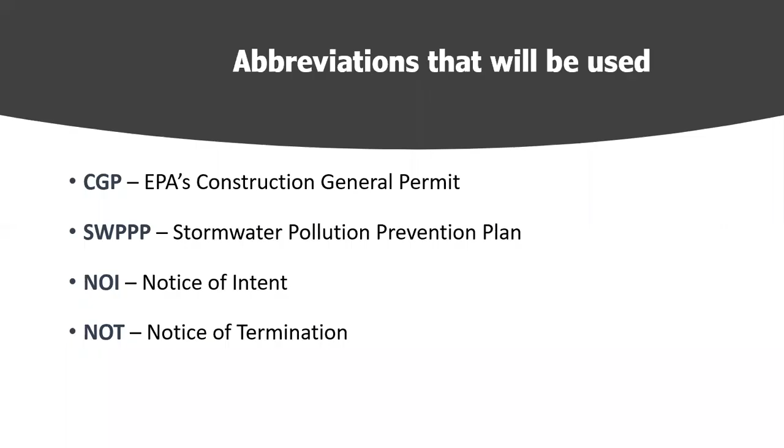Things to keep in mind overall: the presentation today is focused really on what's changing from the previous permit. We're not going to do a nuts and bolts CGP overview. Really, we wanted to highlight just the changes. So hopefully that makes sense. But if you have questions about other requirements in the permit and we have time, we're happy to go over those.

The other thing, secondly, is that when we go about changing a permit, or proposing, in this case, the change of a permit, there's a process we go through. We don't just come up with these things that we feel like putting in the permit. We went through a process here where we reached out to different stakeholders, states, and regulated construction people in the industry. We talked to states and our own inspectors and permit writers as well. And what resulted from that was a list of things that we either needed to clarify in the permit or to change. So that's how that has arisen.

Also keep in mind the bulk of the permit that exists right now, if you're familiar with it, is not changing. The modifications we're looking at are focused on very specific issues or clarifications. And then lastly, one of our thoughts here is that we're hoping that people will read the permit, comment on it, and provide feedback. That's how we learn how this is going to impact you all in the real world. So that's my pitch for you all to comment.

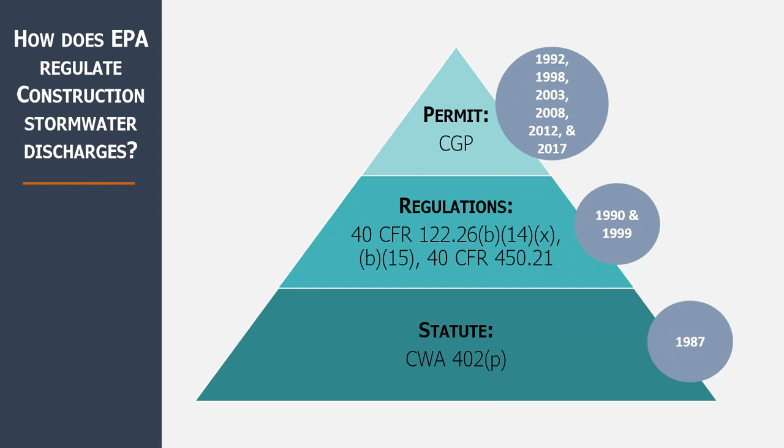What is regulated? We regulate construction activity, stormwater discharges from construction activity. I mentioned that over time this has been established to be 1 acre of land or more disturbance, or smaller disturbances that are part of a common plan of development.

You can think about a residential subdivision that's being built over time, but in quarter-acre chunks, which individually aren't an acre but over time add up to over an acre. So those would be regulated as well.

Basically, a Clean Water Act permit is required, typically a general permit. And what is construction activity? We define it as any earth disturbing activity, but we typically shorten that to clearing, grading, or excavating, or other construction related activities. Other construction related activities could include regrading of roads.

Other activities include placement of raw material at the site and stockpiling of fill material. There are other things that involve disturbances to the surface that could measure 1 acre or more, and those would require a permit.

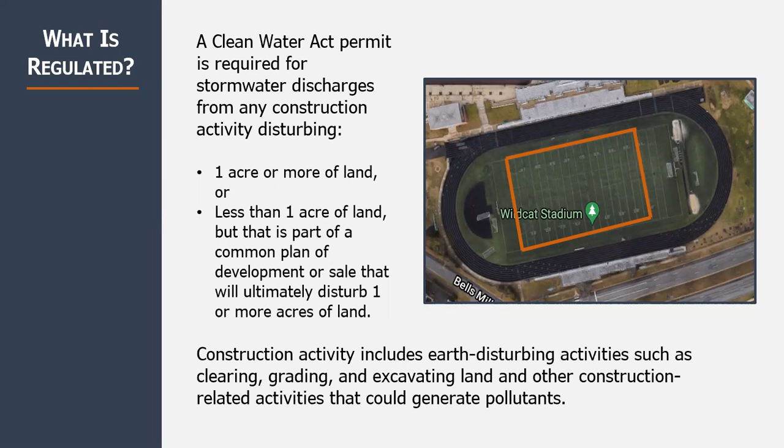There are also minimum federal standards that EPA put out in the mid-2000s, referred to as the C&D rule requirements, or construction and development rule. They're made up of narrative requirements for EPA and the states to include these 5 minimum things I've listed here. They're essentially pretty commonly used principles.

Permit writers are given the ability to elaborate on what's meant by these things. For instance, the first is to design, install, and maintain effective erosion and sediment controls and pollution prevention measures - those are often spelled out in more detail in the permits. You'll also recognize in other permits and in EPA's permit, there's a deadline for stabilizing sites - that's 14 days, established by federal standard.

There's also language about dewatering, which I'll go into in a bit. There's language about prohibiting the discharge of certain wastewaters, chemicals, and other substances we don't want getting into the waste stream - that's where pollution prevention measures come in as part of construction permits. Lastly, if you're using a stormwater basin of some kind, there's direction to utilize outlet structures that withdraw water from the surface. You'll see that in just about every permit out there.

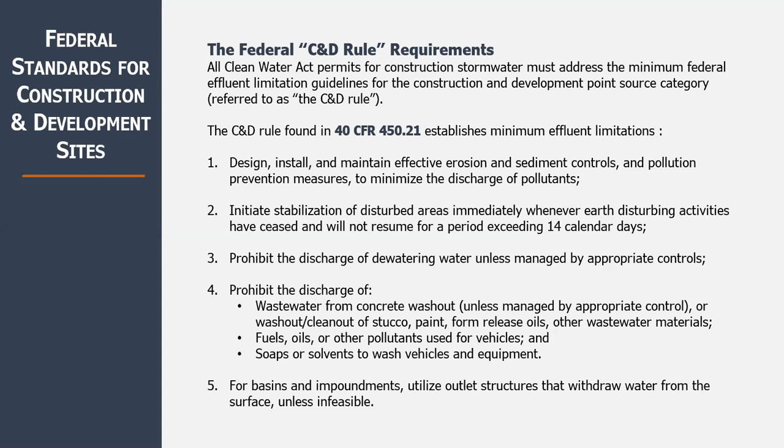We like to think of the CGP as being made up of 4 different bins of activities: you're preparing, you're getting covered, you're taking action, and you're stabilizing. The first step is to prepare - you need to make sure you've got a construction activity coming up, a project.

You would check to make sure you're eligible - basically, make sure you're in an area where the CGP applies and you're disturbing 1 acre or more. You also need to develop a SWPPP for your site to comply with the permit, and then submit your Notice of Intent, the NOI form I mentioned before. You do that online, and the result is you get coverage under the CGP for the length of your construction project.

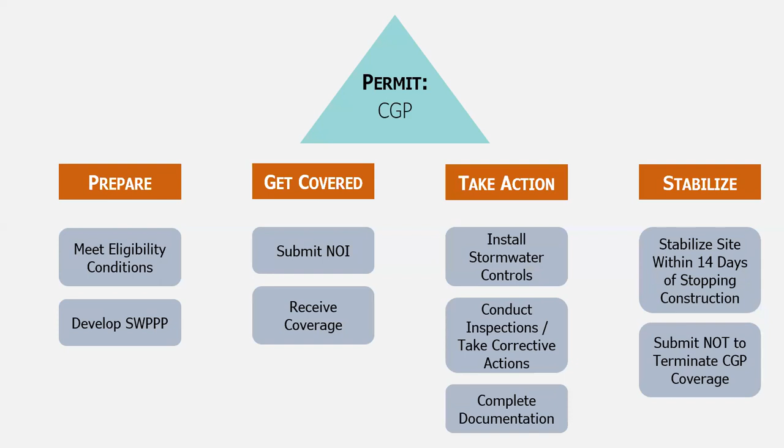Undertaking action, the permit's going to require you to install stormwater controls, conduct inspections and take corrective actions, and then document your inspections and any maintenance or fixes to the stormwater controls. Those are also requirements. Once you're finished, there's requirements to stabilize the site within 14 days, and once you've done that, you submit your notice of termination to terminate coverage.

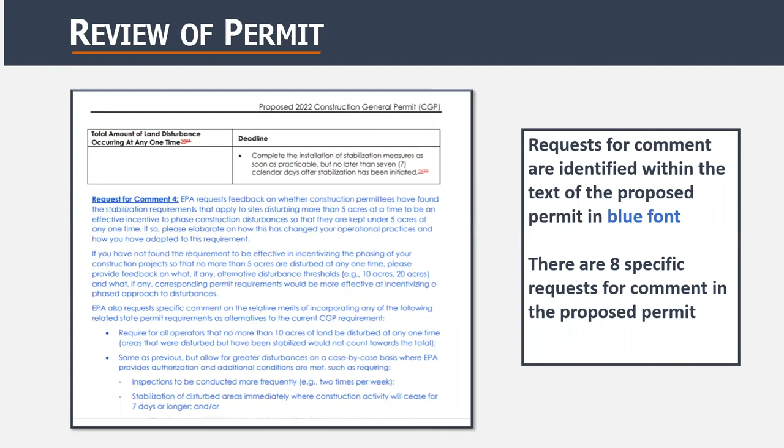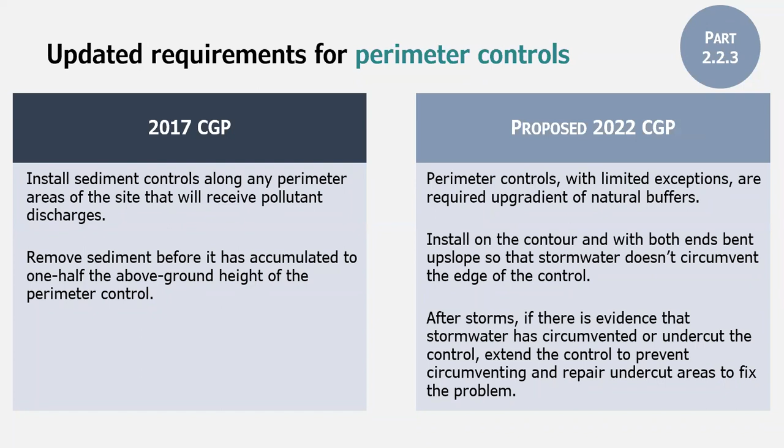The next type of change we made, again regarding stormwater controls in the CGP, has to do with stabilization. I mentioned before that there's a time frame for stabilizing construction disturbances once the project is done, or if you're even taking a temporary pause in construction for a period of 14 days or more, you need to stabilize.

When you're leaving the site at the end for final stabilization, currently under the 2017 CGP, there's no additional requirement to ensure that that's taken place. We've been hearing a lot from our inspectors that stabilization is frequently inadequate, and we would like to address that.

One of the ways we thought would be reasonable would be to ask permittees to submit photographs of the stabilized site. This is something you can do electronically with the NOT form.

We're asking for comment on that, but basically we're not thinking of anything more sophisticated than photos you can take with your mobile phone. We're also asking for comment on whether you believe there's any criteria we should put in place to ensure the photos are accurate, representative, and of good quality, or any other considerations you think we should have besides just requiring photographs.

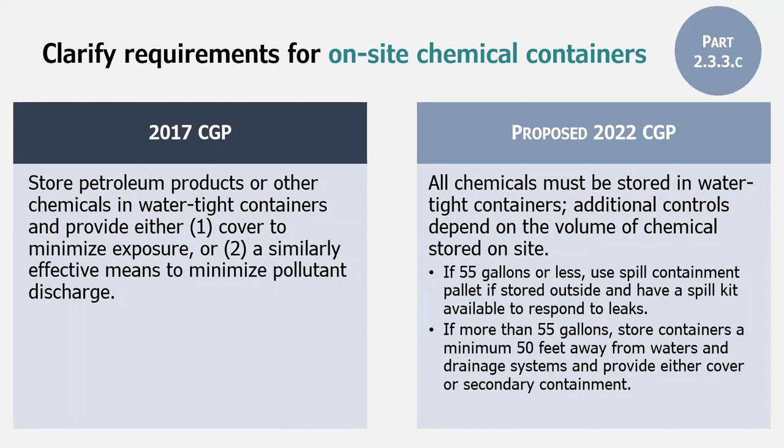And if you're over 55 gallons, we specified that containers must be kept 50 feet or more away from waters or drainage systems, and that you provide either cover or secondary containment. So hopefully that's pretty straightforward.

The next set of requirements have to do with dewatering. I'm also going to stop here before we get into that, since there are a number of slides, and just see, Zach, if we've gotten any questions on the previous slides.

Sure. So one question is: what is the NOT photo submission expectation for projects subject to the arid, semi-arid stabilization exceptions?

I'm assuming that's asking about the arid and semi-arid changes we're proposing. If that's the case, I'll be talking about that in a little bit in the inspection section. But basically, folks should know that if you are in an arid, semi-arid, or drought-stricken area, there are different inspection and stabilization requirements. I'll go over that shortly, but just understand there is specific flexibility if you're in one of these areas. So for now, I'll ask if we can wait until we get to those and see if there are questions based on that.

I think the question was referring specifically to the NOT requirement to submit a photo of final stabilization, and whether that may be different for projects subject to the arid, semi-arid exceptions.

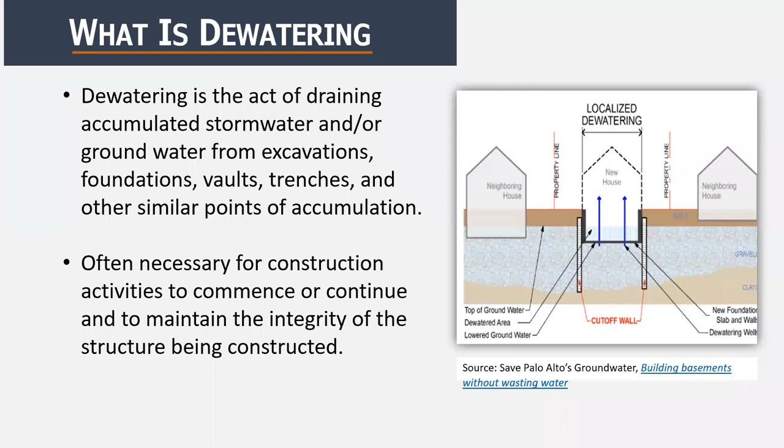The issue is, of course, that water needs to go somewhere, and it's discharged off the site. We've covered these discharges under our previous CGPs, and we have requirements, which I'll go over in a bit. But basically, the issue with dewatering discharges is that they're not like the classic stormwater discharge we're used to thinking about for construction sites.

These are controlled discharges. They can be shut off and shut on. They can be large volumes, can be quite intense. One of the biggest concerns with dewatering discharges is just the sediment that can be contained in there. We've seen on some sites that if you have several hours of a controlled discharge of dewatering water, it can produce more sediment than might otherwise be discharged from an entire construction site over the course of the project.

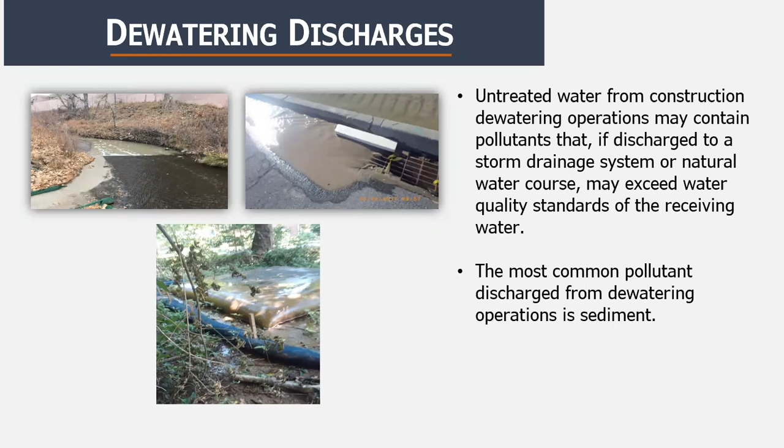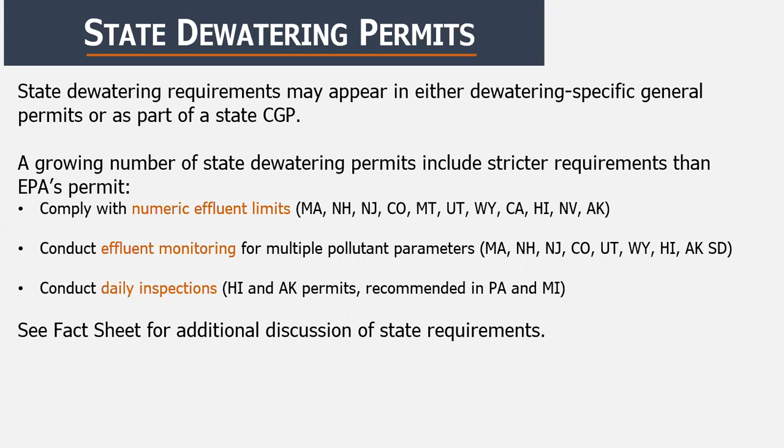What we wanted to do first is look around and see what the other states were doing. They either regulate dewatering discharges as part of their CGP, like EPA does, or they regulate them in a specific dewatering permit. We found that a number of states have controls that are stricter than what EPA has, with numeric effluent limits. A lot of this is captured in our fact sheet that supports the permit, so if you're interested, you might check that out. Also, a number of permits require effluent monitoring, and some have daily inspections, and these were some of the considerations we had in thinking about how to modify our permit.

I'm going to go over some of the areas where the proposed permit is modified from the current permit. The first area is greater specificity to describe the dewatering controls. The current permit requires that you treat dewatering discharges to minimize pollutant discharges, with general guidelines that if it's uncontaminated and non-turbid, you don't need controls. There's also requirements having to do with oil and grease removal, and controls dealing with velocity dissipation, which has to do with erosion.

What we're looking to do in the proposal is clarify that all dewatering water must be routed through a sediment control designed to prevent discharges with visual turbidity. We'll get into what visual turbidity is in a minute, but basically it's visual cloudiness in the water that looks like a sediment plume.

We're also excluding coverage for dewatering discharges from contaminated sites, which we define as sites that are considered a Superfund site or part of a RCRA cleanup site. If your site is on there, you would not be able to be covered under the CGP to discharge dewatering water; you'd need a separate permit.

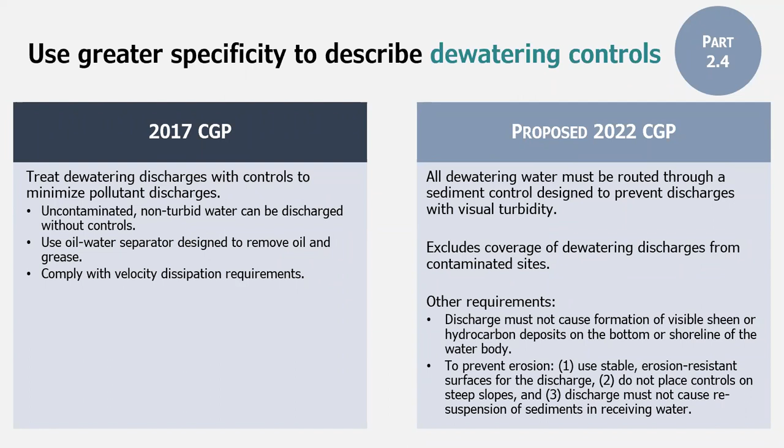So those have to do with the controls for dewatering. We also include some modifications for inspections. In the current permit, we don't have dewatering specific requirements, but in the proposal we are adding them. Not all sites are going to be dewatering, by the way. So keep in mind that if this doesn't affect you, if your project isn't dewatering, these aren't things you'd need to comply with.

But if you are dewatering, the proposal would have daily inspections, which among other things would document when the discharge began and ended, estimate the rate of discharge, whether you're seeing a sediment plume or visible sheen, and take photographs of the dewatering water both prior to and after treatment, as well as the treatment control and point of discharge. These photos are different from the photos we were talking about with stabilization - these are just things you would keep on site with your inspection records.

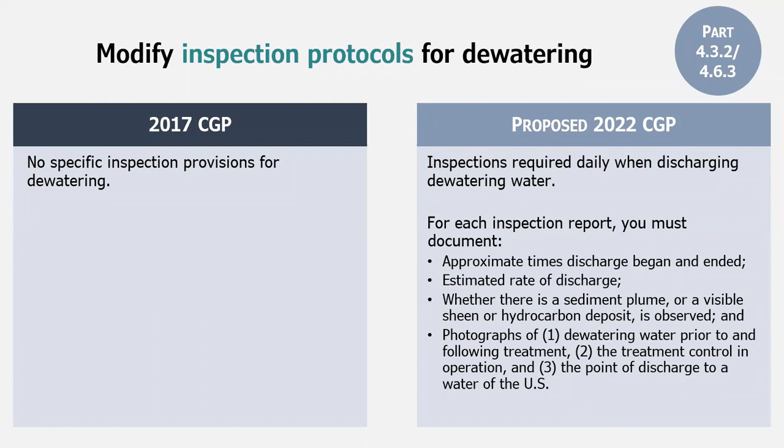So that's inspections. Another thing with dewatering is corrective action - if you see a problem, what are you supposed to do about it? I mentioned that in the inspection, the proposal is to look for a sediment plume or visible sheen of some kind, or a deposit that you see or that you've been informed is out there. Then you would take what's called corrective action to, among other things, immediately suspend the discharge and try to fix the problem - figure out what's causing it and fix it.

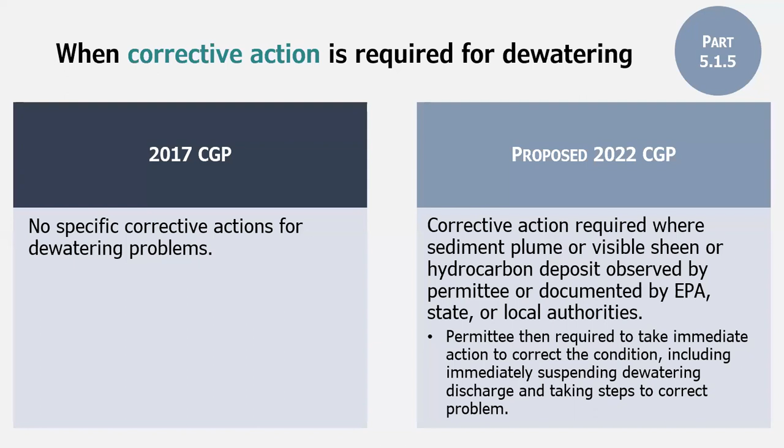Okay, so those are all the changes that are proposed. We're also requesting comment on some measures that have to do with protecting sensitive waters. So when we think of sensitive waters, we're thinking of waters that are impaired for sediment or that are considered high quality waters - those are waters that have been labeled by the state as tier 3 waters or tier 2 waters. In the past we haven't had specific additional requirements for sensitive waters.

But here we're asking for comment on whether it makes sense to add a turbidity monitoring requirement for permittees. So if you are discharging to a sensitive water and you're dewatering, we're asking for comment on measuring turbidity during the discharge. I'm going to go into this in a little more detail, but we're looking at two potential options: whether to have a benchmark monitoring approach or just an indicator monitoring approach. I'll explain what those are in a second.

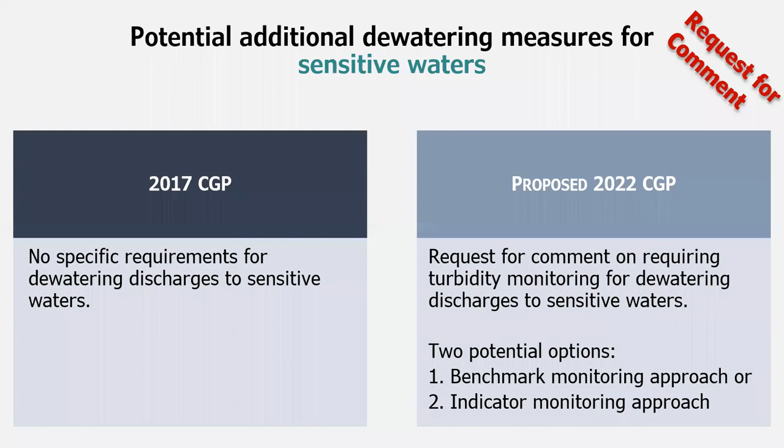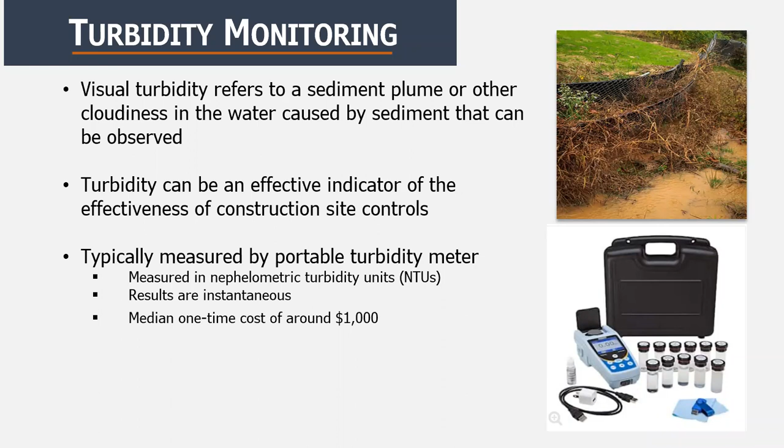Just to back up a little about turbidity - when we talk about turbidity, we're thinking of something that's visually obvious. It refers to a sediment plume that you can see, or cloudiness. Turbidity has been found to be an effective indicator of whether your construction site controls are working or not. It's easy to measure - there are portable turbidity meters you can purchase, ranging in price but averaging around $1,000. They're easy to use and give results instantaneously, and they basically measure what's called NTUs, or nephelometric turbidity units. This is a measure of the amount of light that comes off a water sample, and it's a function of suspended matter or suspended sediment. So it can be effective to use for pollutant controls.

I mentioned there's two options we're asking for comment on. The first option would be called a benchmark monitoring approach. When we say benchmark, what we're thinking about is that you're comparing the level of turbidity to an established level that's considered either a good level or not so great. Based on that, you might need to do some additional work to lower the sediment levels.

Basically this approach would have the permittee that's discharging dewatering, on any day they're discharging, monitor once per day from the discharge point - this would be after the treatment occurs. They would compare the average turbidity level to an established benchmark. I should mention that in the permit there's a request for comment you'll see - it's in section 3.3, and it goes into some of these details - but the benchmark we were contemplating or proposing is 50 NTU. I'll get into that in a minute.

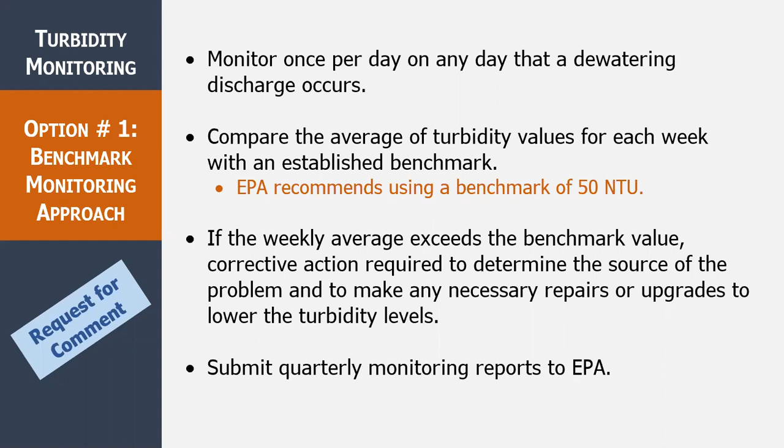Which is starting to get cloudy. But 50 NTU was within the range of state standards that had specific numbers. They don't all have specific turbidity numbers, but it seemed to be in the range there. 50 is also the number used in the industrial stormwater permit, which we call the MSGP.

We did also ask the states for data they might have from permittees, and 50 seemed to be a level that most sites were able to achieve, at least based on the limited data we saw. The alternative would be to use whatever state standard applies in the area of the site.

The problem is that most states where the CGP is effective rely on a standard based on the natural background level of turbidity. So they'll say something like Class B water shall not exceed naturally occurring conditions by more than 10 NTUs. We thought about that, but the problem is you'd need background turbidity data, and the benchmark would change for every site. So from a program standpoint, we thought that would be very difficult to implement.

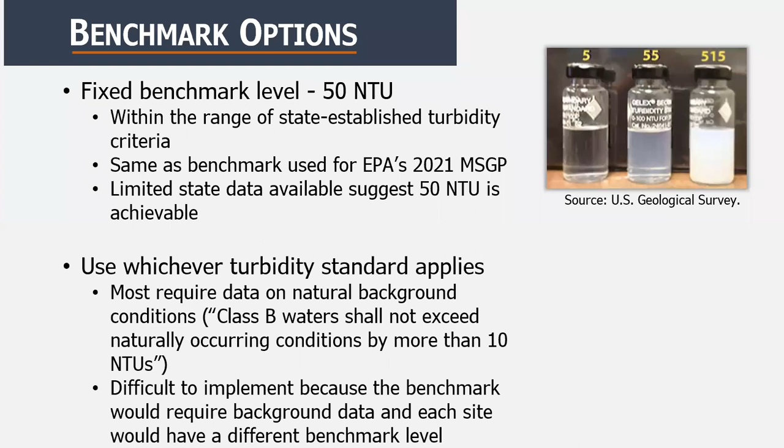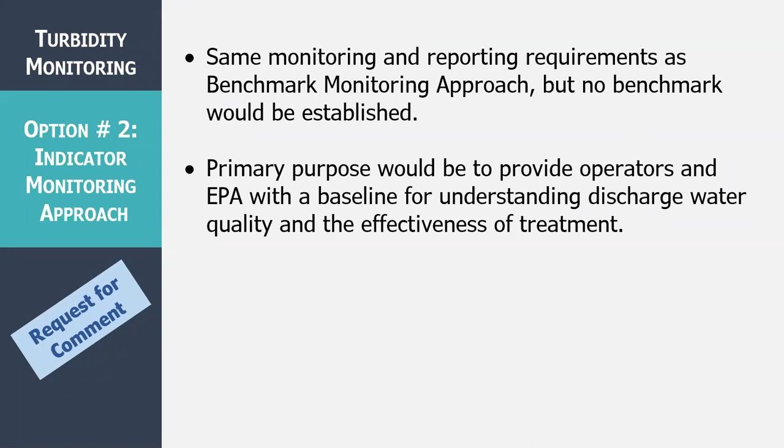The first option would be the benchmark. The other would be to have permittees collect this data and report it the same way as under option 1, but without a benchmark. For at least this permit term, we would just be collecting data to give us an understanding of how effective treatment controls are, and to give operators an understanding of what turbidity is coming off these discharges.

We're also asking for comment on other areas. Are you supportive of including monitoring in general for dewatering discharges? Do you have a preference for option 1 or 2? And if you've done turbidity monitoring on construction sites before, tell us about what that's been like. What instruments did you use? Did you find it reliable to know the level, and did making changes based on the turbidity level end up working to reduce turbidity?

Did you report or just keep the records on site? Did you rely on a contractor to do this work, or did you do it yourself? And how much did it cost? These are all things that are in the permit, and if this is something you have an opinion about, we encourage you to submit comments on.

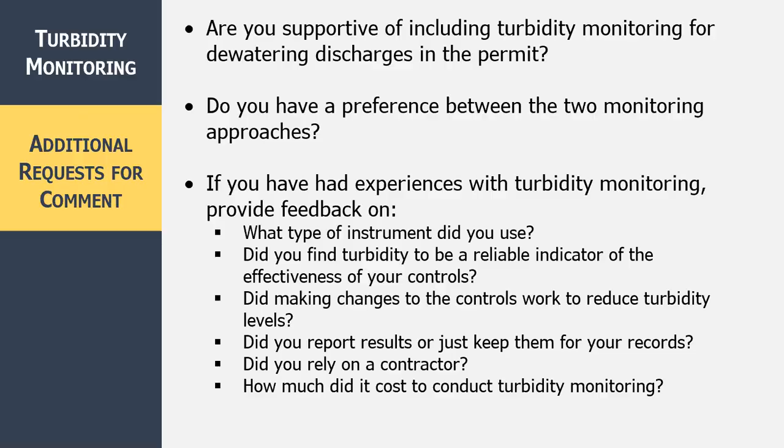I'm going to stop there again since that was a lot, and just see if there's any questions about dewatering or anything else. Sure, we have quite a few questions, so I'll just work my way through them and stop when we have to.

One question is, will turbidity limits take into account what background levels are? That is, can we subtract out background turbidity for purposes of compliance? Not under the approaches we described, but under the benchmark approach, it would just be, are you above or below? However, if the commenter thinks that's a better approach, we'd be willing to consider any comments about that.

Another question is, for benchmark monitoring quarterly reports, would these be submitted via CDX CGP program? How would EPA or the operator know a quarterly report is due? How would a late report or no report be considered a corrective action or enforcement action? Would the reporting structure follow the discharge monitoring report format on the MSGP slide?

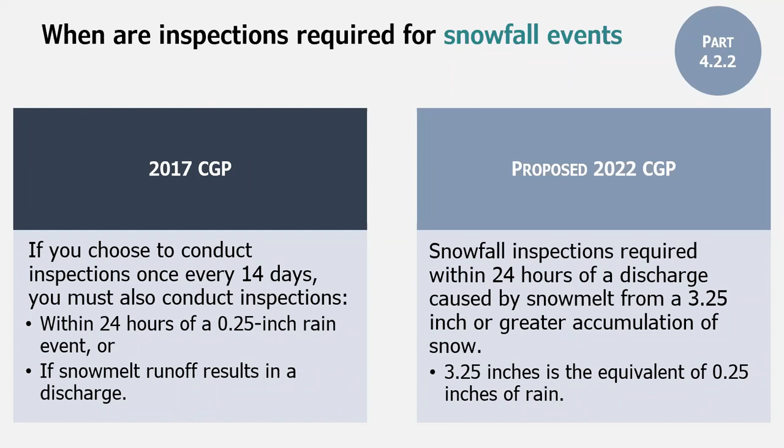We include some guidelines on how to measure 3.25 inches, with some suggested ways to do that. But basically, that's it - just a clarification of what snowfall amounts would be.

We mentioned before about arid, semi-arid, and drought-stricken areas, but there's inspection requirements for seasonally dry periods in arid or semi-arid areas. This is language we've had for a while, but basically if you're in one of these areas, you have a different inspection frequency during what's referred to as the seasonally dry period. We haven't defined what seasonally dry period means in the past, so this was difficult to implement from our perspective and also hard to understand from the permittee's perspective. So we did some research, and the proposal includes a specific definition: a month in which the long-term average total precipitation is less than or equal to half an inch of rain.

We're also putting out a tool for permittees to use - I've included the link here to check it out - but you basically search by zip code where your site is, and it would tell you if you're in an arid or semi-arid area, and then whether there are months out of the year that are considered seasonally dry. And if that's the case, then during those months, if your construction is occurring, your inspection frequency would be monthly, once a month.

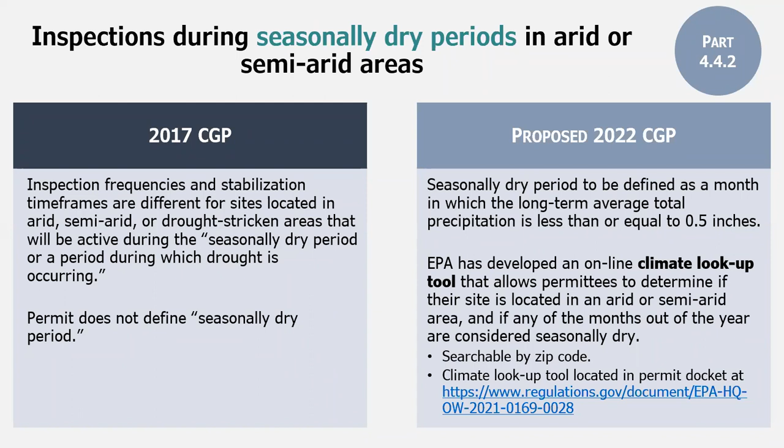Moving on to the next set of changes: under the current permit, when you conduct an inspection, you're required to look for signs of erosion or sedimentation attributable to your discharge at points of discharge. What we're proposing to add is that the permittee also look for signs of sedimentation at points downstream from the site, if it's attributable to the discharge.

We're not asking people to walk the stream necessarily, but from points that are visible from your site and obviously attributable to the discharge, such as sandbars with no vegetation - that's obviously an accumulation of sediment from probably some storm event, possibly from a construction site. So those are things to look for, and we've added that to the permit as a proposed additional inspection item.

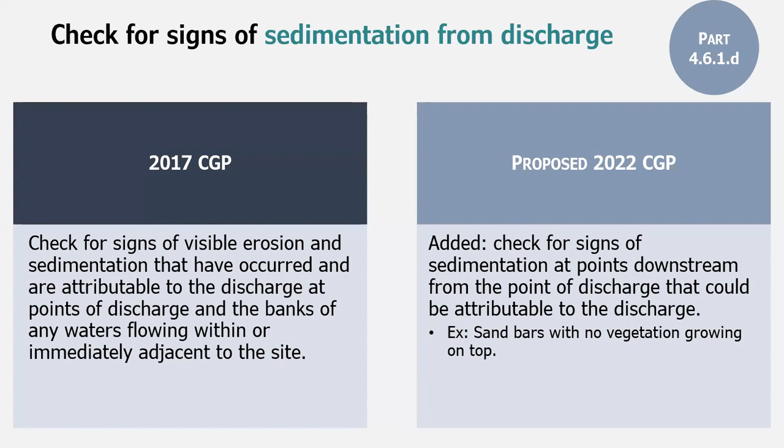Another thing we're emphasizing for this permit is training. The current permit requires that you have a qualified person on site conducting inspections, someone who has an understanding of stormwater controls and how to conduct inspections and spot problems.

We have found as EPA that inspections are an area that could be improved. There's not great documentation of whether these are occurring. Not everywhere - there's a number of sites that do a really great job with this, but the ones that don't, there's no evidence that they're doing the inspections at all.

One way we're thinking in the proposal to improve this is to provide clarification on what kind of training would be necessary. So instead of the qualified person, which was difficult to define, we're requiring that any personnel conducting inspections either complete EPA's construction inspection course and pass the exam, or hold a valid construction inspection certification from another licensing program. There are a number of those out there, and they'd need to address the same things we would, like principles of erosion and sediment control, proper design and installation of controls, and performing inspections.

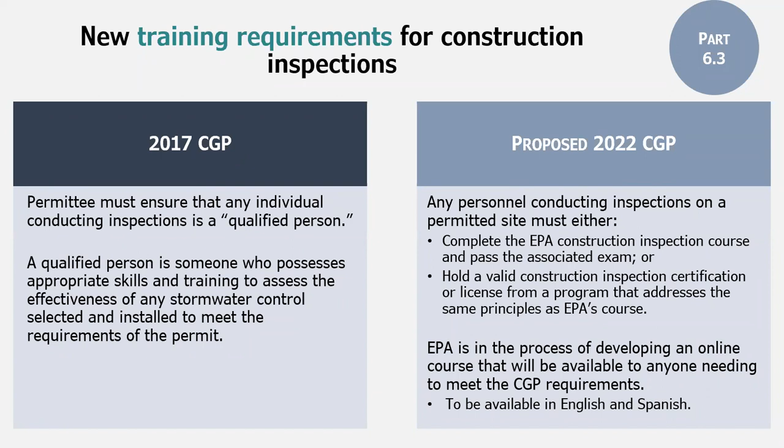Also, the proposal would differentiate between routine maintenance and corrective action. Before, we didn't really say what we meant by routine maintenance. The permit requires that if you need to do routine maintenance, you do it by the end of the next business day, but we don't really say what that is. We do say how long you have to do it. And if it's not something you can do by that time, then you need to do corrective action, which is a little bit more involved. You have to do some paperwork to finish that.

The idea was to define routine maintenance as repairs or replacements of controls that can be done within 24 hours. If it takes longer than that, then you would need to do that under corrective action.

Also, if you're finding that you're doing the same routine maintenance over and over again, and we suggest 3 or more times, that would require taking a closer look under corrective action to see if it's the control or if something else is wrong.

And if the control was not designed or installed correctly, that would be something to do under corrective action as well.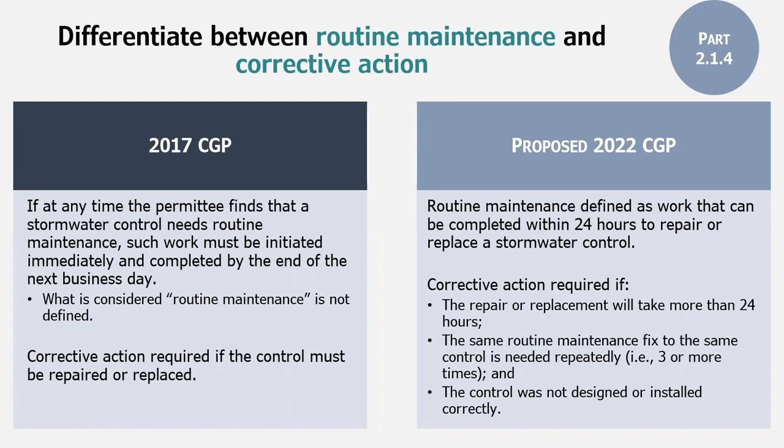There's also a clarification in the permit that inspection reports and corrective action logs, as we call them, or any of these records could be kept electronically. We have been silent on that in the past and found that enough people are asking us about it. We did clarify on our website that you can keep these electronically as long as they're as reliable as paper records. But in the proposed permit, we include language in the permit itself to clarify that electronic records are acceptable.

I'm going to stop there again, see if we have any questions before we move on to the last section.

Sure, we have a couple questions.

First one being, does EPA plan to have a cost associated with the online training course and testing? Will a certification be issued once the course is passed? For EPA's course, there would not be any charge associated with it. And providing the person passes the exam, there will be a certificate that they can print out to constitute their evidence that they passed the exam, and they'd want to have that kept somewhere.

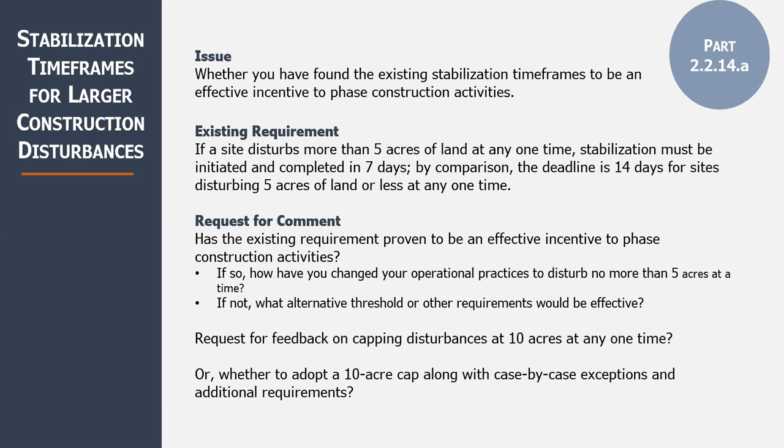So that's that one. I think this is the last one. We've made it to the end.

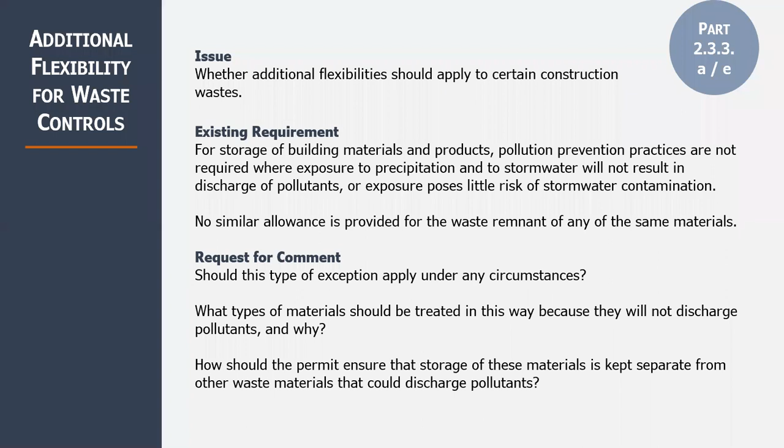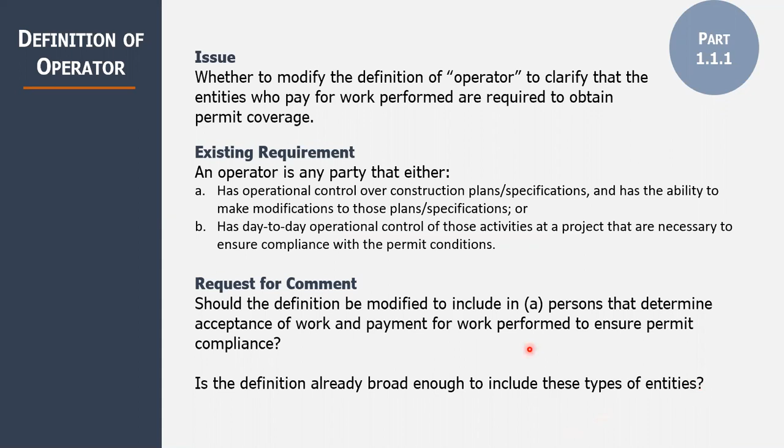Thank you. The next question is, when recommending turbidity monitoring, are you taking into consideration turbidity of the receiving stream? There are many streams that will have high turbidity naturally on rainy days.

As it was written in the proposal, we would not take into consideration the natural background levels. I understand the question, I think it's a good area for comment. What we were looking for is a benchmark that for the discharge itself would indicate whether it's likely to be high, whether we consider that to be high or low before it even gets into the receiving stream. But there is some precedence for using background levels. I know the MSGP has pollutants where, for the benchmark monitoring part, there is a natural background consideration. So I think I would encourage folks to shed light on that if they have thoughts in that area.

Thank you. The next question is, what happened to the US EPA proposed 280 NTU from the 2009 Construction and Development Effluent Guidelines and Standards final rule that was removed from the proposed rule, and now the US EPA proposes lowering it to 50 NTU?